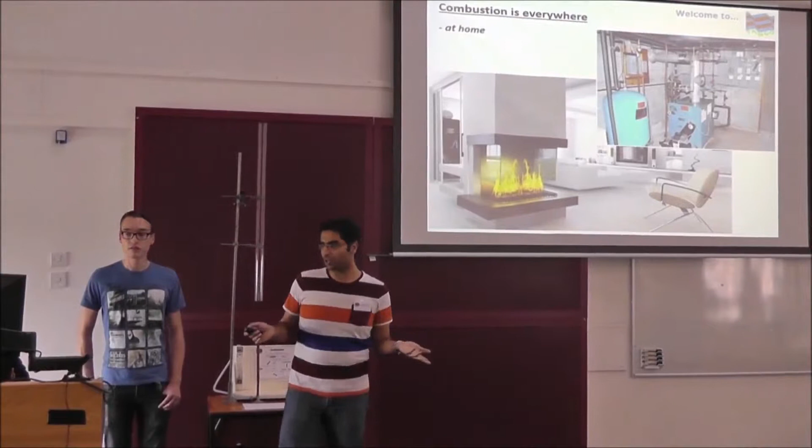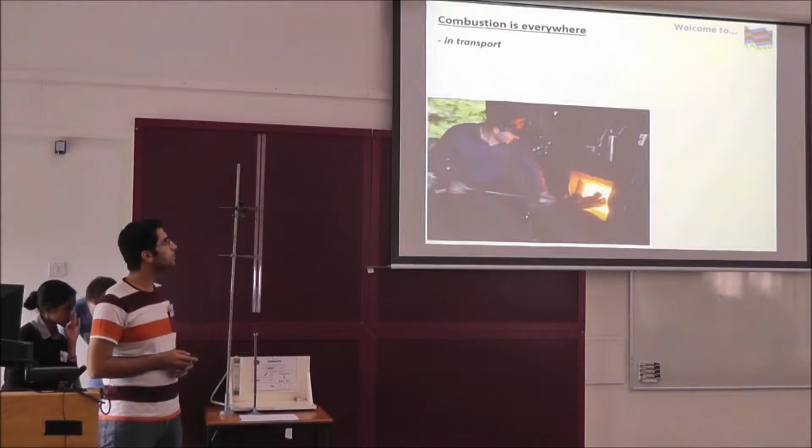About combustion, I can tell you that it's practically everywhere. So you have combustion at your homes, like in your home boiler systems, or a fireplace. You might have some in your homes. Combustion is in transport, as you might have imagined. A coal-burned train, for example, or a more sophisticated type, gas turbines in airplanes. Combustion happens inside, gas is being burned. And of course in cars, inside the cylinders there is combustion going on, things are being burned.

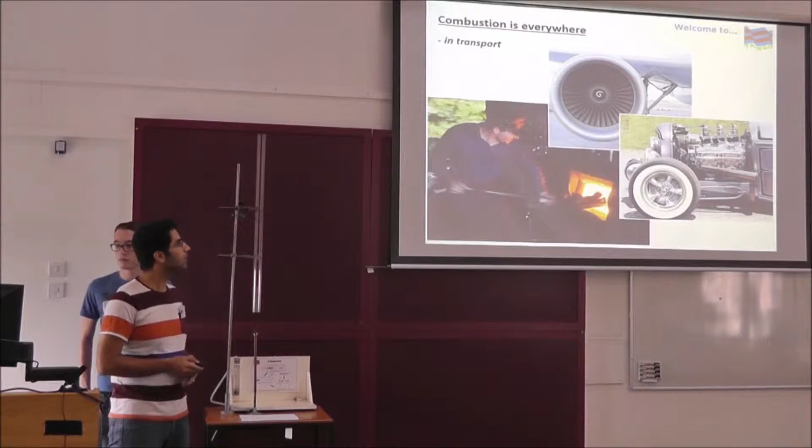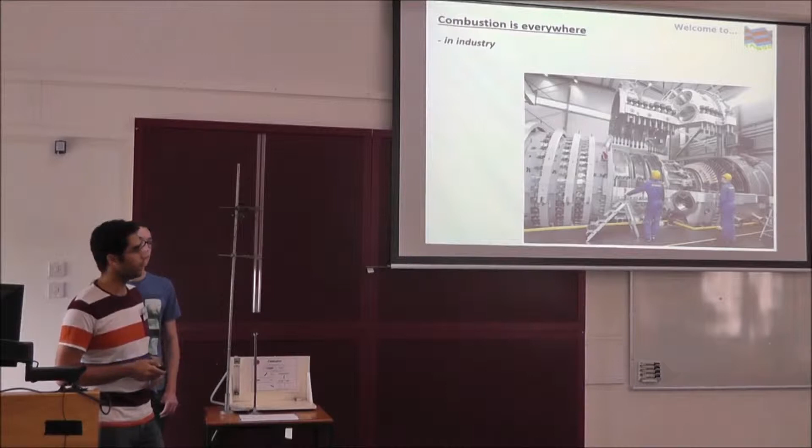Also it is in industry. In so many industries combustion is currently being used. For example, large industries like power plants, they have a scaled-up version of a gas turbine in an airplane for producing power. Or any other industry that needs to heat something up, like the glass industry. So they have a furnace, they burn something, they make the heat.

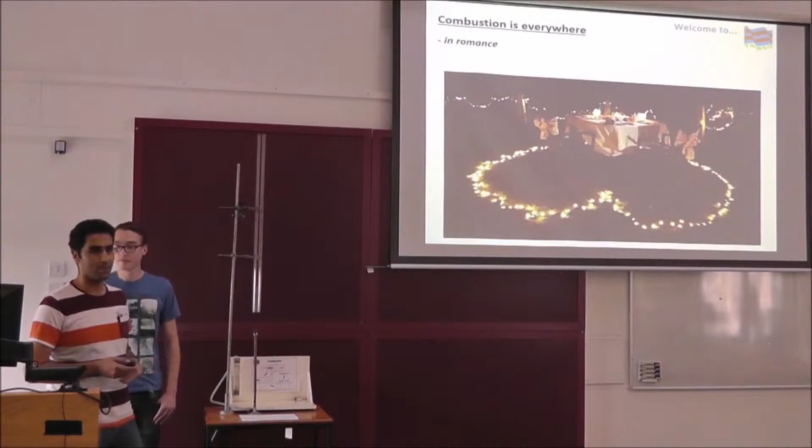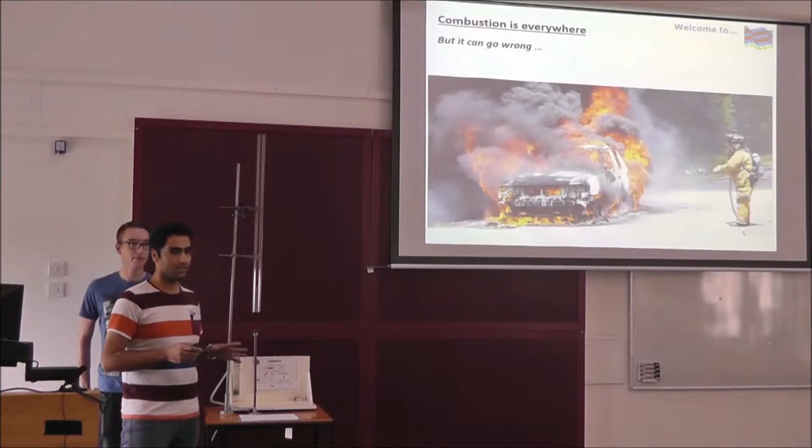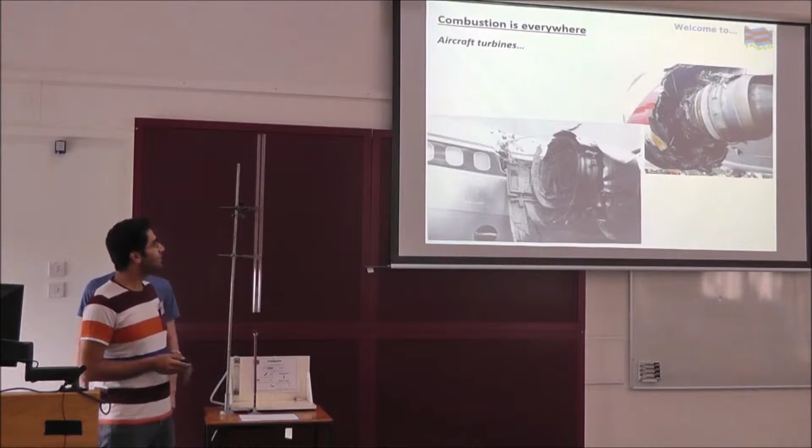And it's very nice and very beautiful like this, but it can also go wrong. Like a fire which is not under your control. So we want combustion only if we can control it, so we can make use of it. It could go wrong in many ways. It can go wrong in airplane engines, which of course we are all sort of afraid of. It can go wrong in our furnaces inside the houses if they're not designed well. If we don't do our jobs well, it might happen in home boiler systems. Or in many other cases like in car engines, or just simply when you're having a barbecue. It could just burn the whole thing.

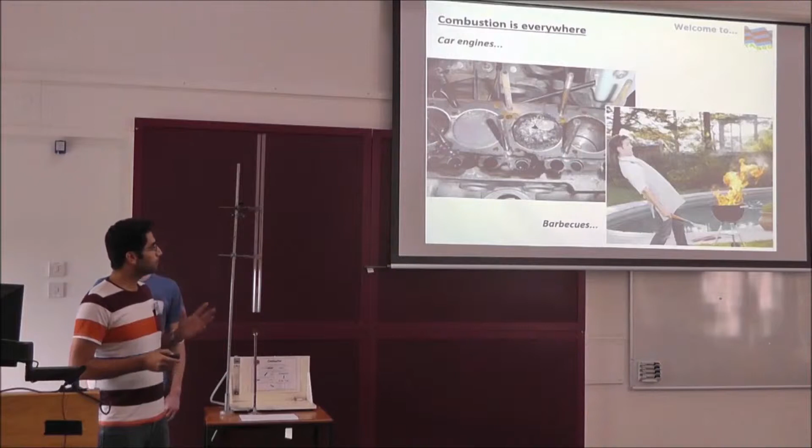So one of the main things that can make combustion go wrong is combustion instability. This is one of the cases where it goes out of hand, that we don't want to happen. We want to somehow prevent it. And my colleague Luke is going to explain more about this part.

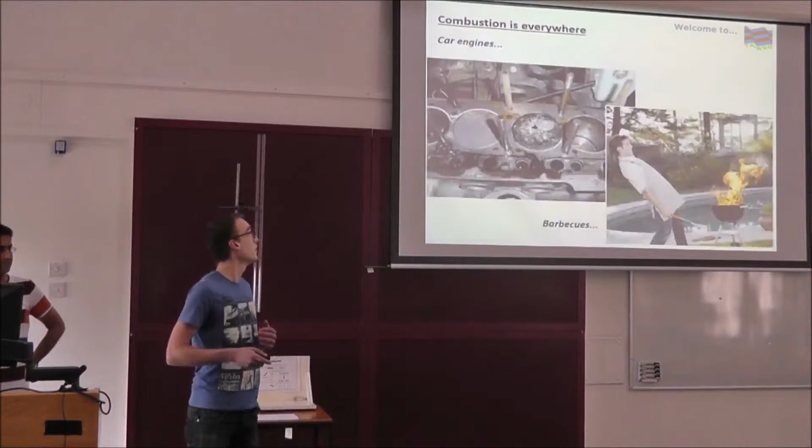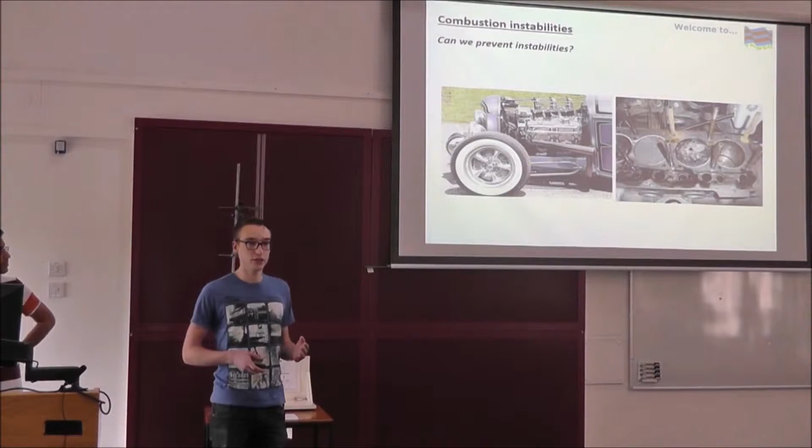So thank you, Naseh. So in this project, what we want to do is get some more information, so we can just drive the car without this happening here. I'm talking about combustion instabilities, and first I'm going to show a demo of what this is about. So, okay, I'll move the stuff.

So what we have here is just normal gas. We have a valve and we have a burner here. So we're going to... Okay. Remember again, fire exit. So at the moment nothing happens. Yeah. It's all as it should be.

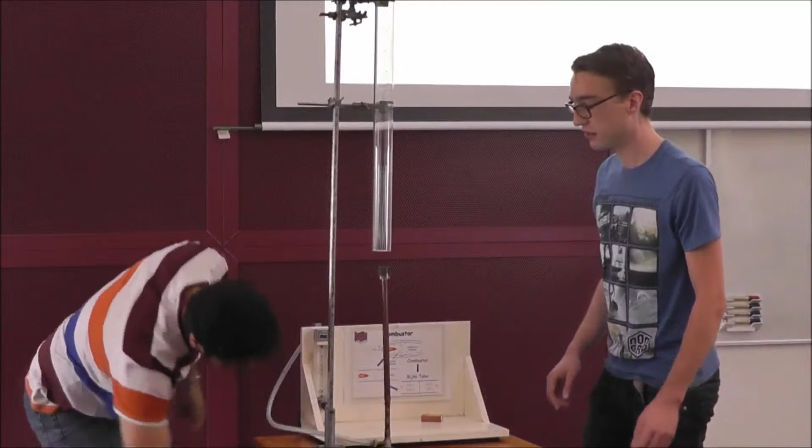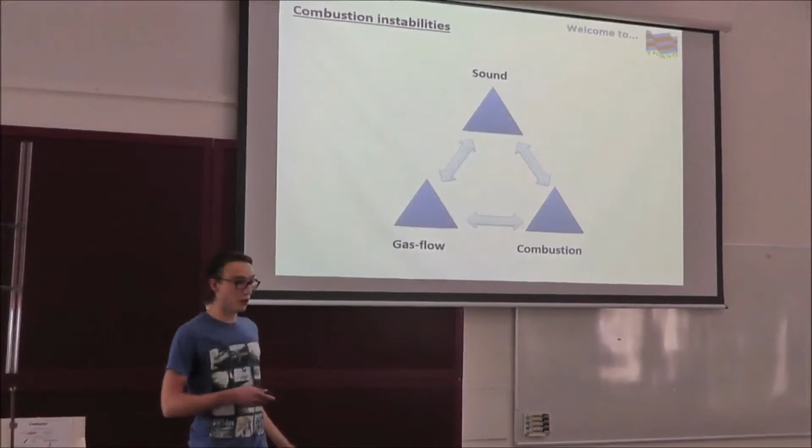So this is then the combustion instability, and how does it happen? It's an interaction between the gas flow, the sound which is also in the tube, and then also the combustion itself. However, as you can see, this is going to be very complex. That's why we need such a large cooperation, so we have so many different aspects of this combustion instability, and we have to research every aspect and try to combine all these different phenomena.

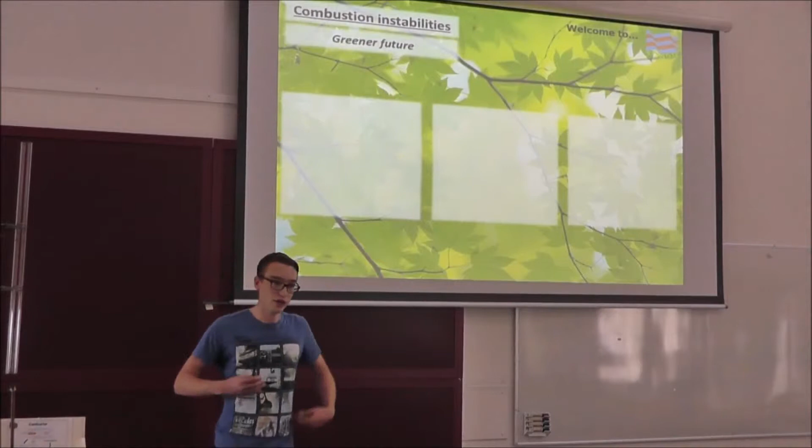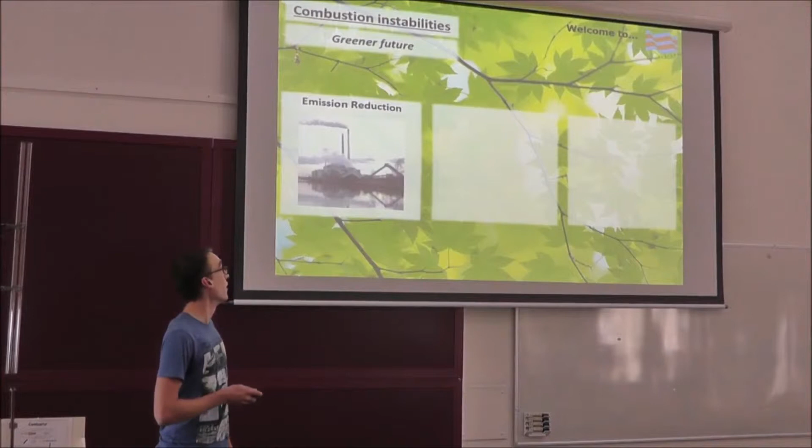But then why should we do this? The idea is that we want to go to a greener future. We want to reduce the emissions from power plants. Furthermore, we also want these power plants to operate dynamically. For example, if we build more wind turbines and there's no wind, we have to put in more energy from the gas turbines. But then on a windy day, we have to reduce the energy from the gas turbines to have a constant level of total energy.

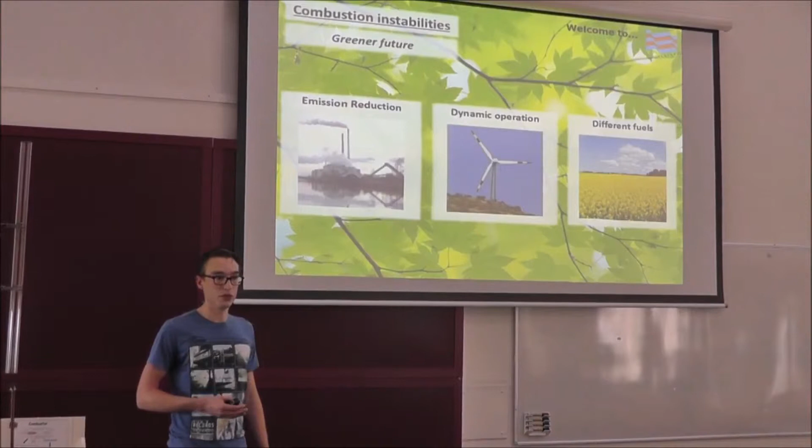And furthermore, we also want to use different fuels, like green fuels from plants and trees. However, that's where the trouble starts. It becomes really difficult to incorporate all these different aspects in one combustion plant. So how do we cope with this? Via research. And now Aswathy is going to tell about how we do this research.

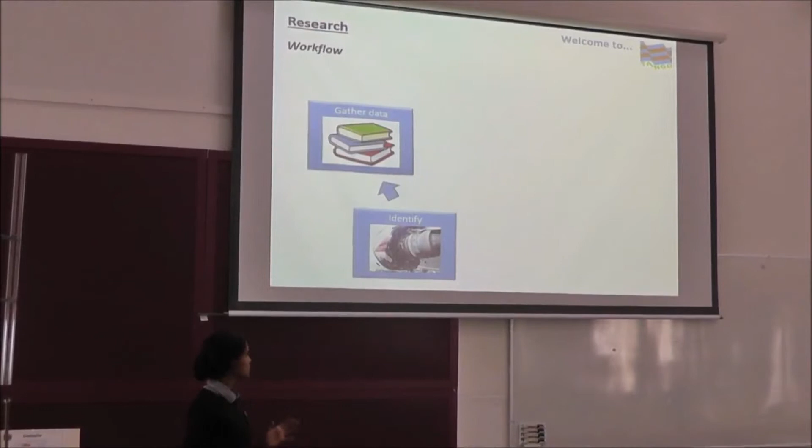So, as Luke said, how do you do this? I'll be explaining how we do research as a flowchart. The first step in doing research is you identify the problem you want to solve. The second step is you gather data from the problem. I'll just give you a simple example. Let's say I have a physical process and I have some data points like this.

Then I want to represent these points as a mathematical expression. In other words, I want to express my physical phenomena in terms of maths or equations. So I take these data points, I do some tricks, and then I try to construct a mathematical expression. That step is called modeling or mathematical modeling. My first guess would be a straight line that just passes through this. So that becomes a mathematical expression to explain these points.

The next step I do is prediction. I want to make sure the mathematical expression I got is right. So I use this expression, let's say it's called a function, to make more predictions about my physical process. Let's say these are my predictions. But I cannot stop with this. I have to check whether these predictions tally with my physical process.

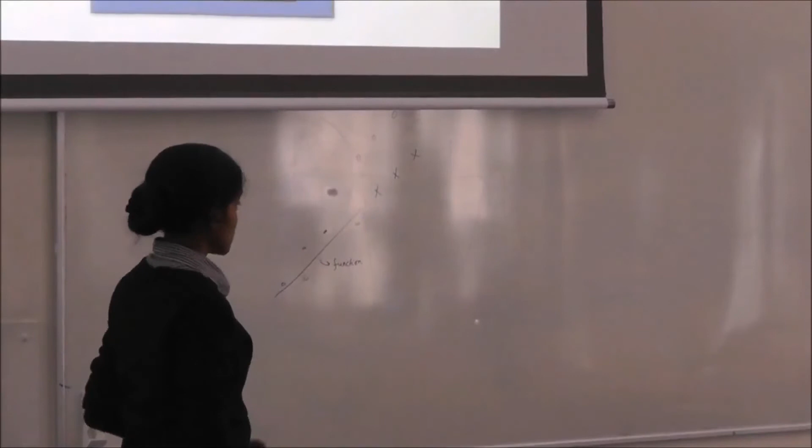So I do experiments. I collect data from these experiments. Then I compare with my predictions. Let's say these are my experimental values. If you compare these two sets of data, you can see that this function cannot represent these points. So I do the next step. Do my predictions and my experimental values agree? If not, I'll do this cycle again.

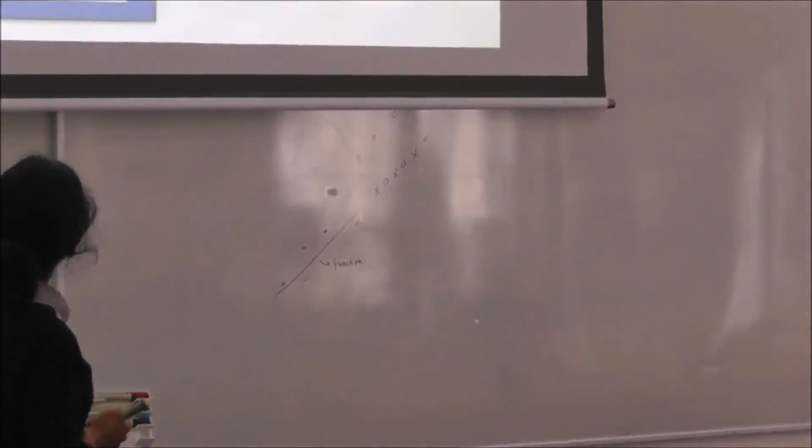I'll gather more data. I'll try to fit, I'll model a mathematical equation. I'll try to do a prediction. Then I compare with experiments. Let's say I have a couple of points which agree with my mathematical equation. If they agree, then we explain our results to the world through conferences, by publishing in journals, or even events like this. So that's how we do research. It takes a lot of iterative cycles.

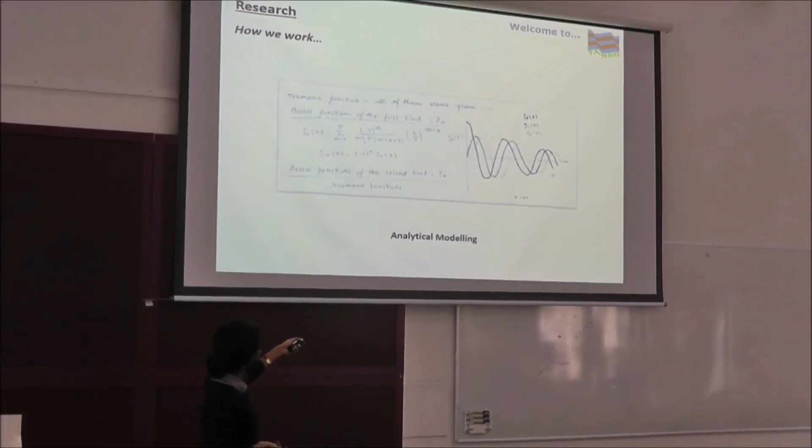On the next slide, I'll show a couple of real-life modeling examples. This is analytical modeling. We have mathematical equations, things like that. Then you have simulations. Using the mathematical equations, you try to do simulations. And you compare with experimental data just to validate that you are getting the right model. This work is done by the TANGO team here.